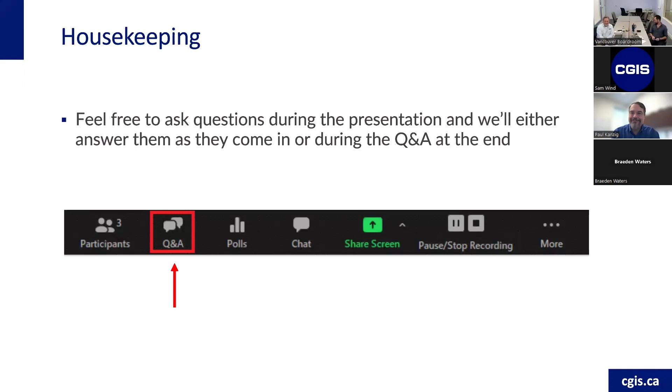So thank you, everyone, for your time. We'll run through this. Hopefully, some of this is maybe information you already know, but there should be some interesting topics in here, so we all come away with a better understanding of Adams' approach to check valves in water.

Adams is a German-based company, been in business for over 60 years now, still family-owned and operated. Back in 1960, Adams invented the triple offset metal-seated butterfly valve, which we'll touch on a little later in the presentation. We do have an extensive network of sales reps and distributors, premier companies like CGIS that cover Canada for us.

As I mentioned, our home office is in Herne, Germany. So if you were ever to go over there for witness testing, you'd fly to Frankfurt and then hop on a train for about an hour and a half. We've got over 1 million square feet under roof there in Herne. We do have another facility in Switzerland, right there at the base of the Swiss Alps. Their primary focus is going to be on large diameter valves for the hydroelectric industry, penstock, fixed cones, etc.

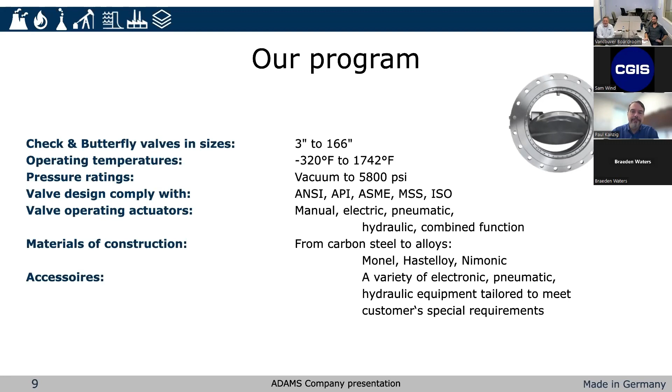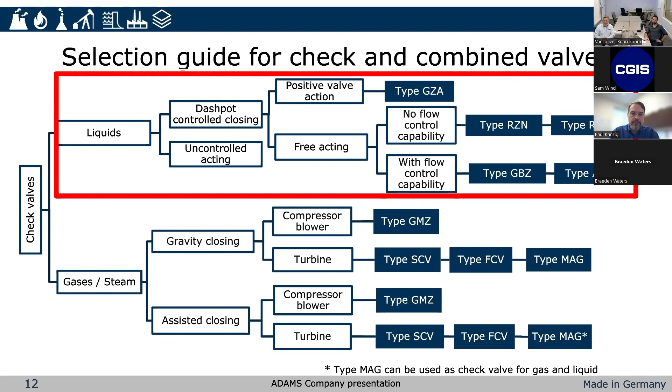Oh, skipped over there. So we have the most basic question, right? Why use a check valve? The simple answer is a check valve is going to allow flow in one direction and keep it from flowing in the other direction. What Adams focuses on is smooth operation of the check valve in opening and in closing. And unlike gases, which are compressible, obviously water is not.

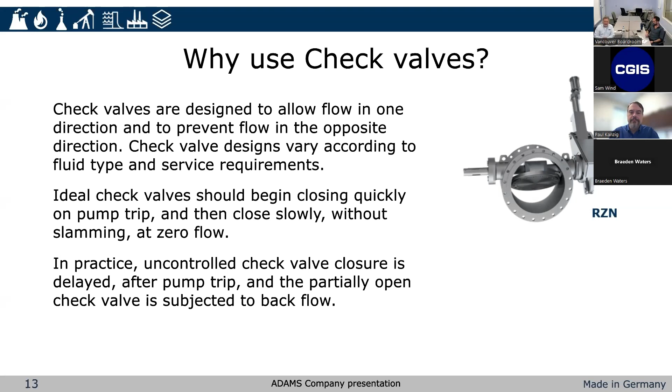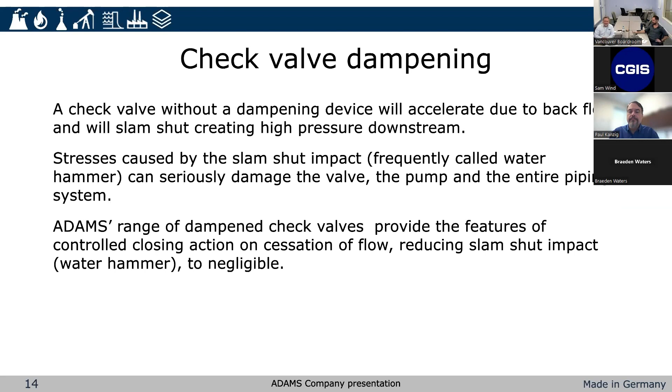So we place a very high emphasis on eliminating water hammer, which is why all of our check valves have some form of damping system, with different setups for adjustability and timing. We'll see just a standard check valve. You obviously have the pressure go up as the flow increases and then become steady.

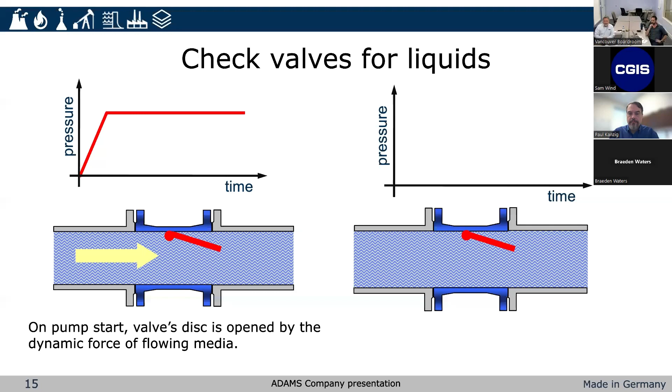The closing of a standard check valve is where our damping system becomes critical. We want to avoid that shock to the system that could damage the valve, obviously a very expensive pump, the piping. We've seen field applications where the piping has jumped off of the rails completely. So we want to protect all the equipment. We don't want slamming. We obviously do not want water hammer.

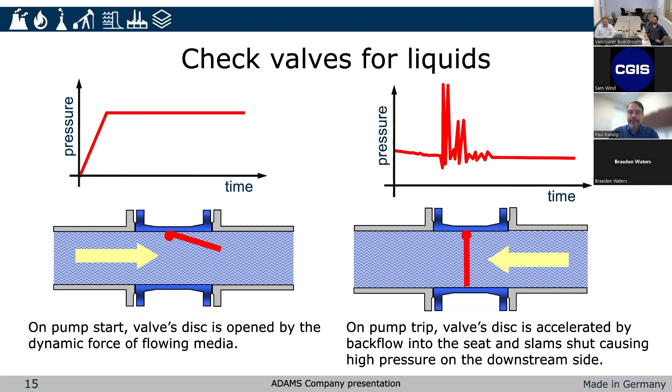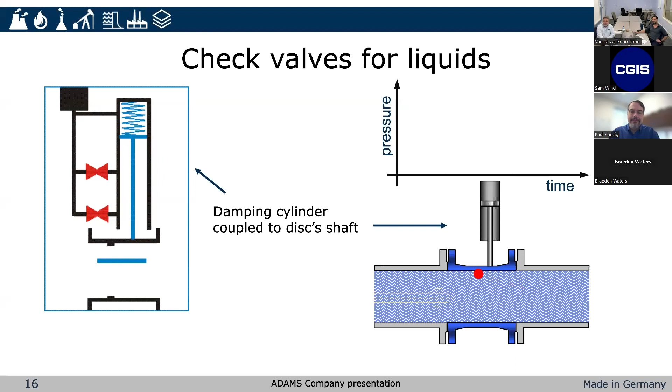So just a basic layout of our dampening system will include a spring hydraulic piston with, you can see, those two red valves on the depiction there. Those valves are field adjustable, and that's what gives you your multi-rate closing of the disc, so that when a customer experiences a trip, the closure is smooth. It doesn't slam, it doesn't damage the disc, and we don't get water hammer.

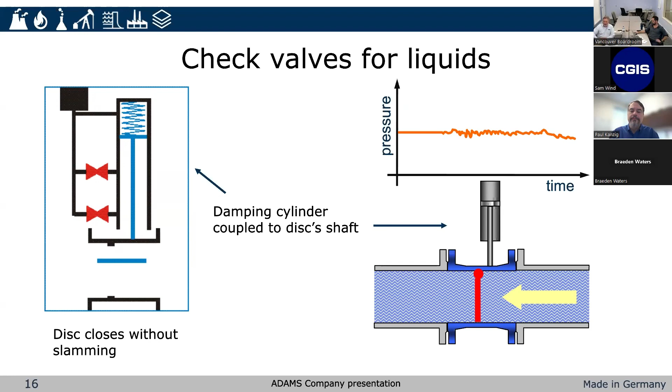Further here you can see, because of Adams' high eccentricity of the disc, this also aids us in smooth operation of the valve, keeps it from fluttering or jumping, and also brings it gently into the seat. I believe this is once the pump is activated. You'll see the hydraulic system controls the opening and closing. But the valve is a free acting check valve at this point. It is just smooth operation.

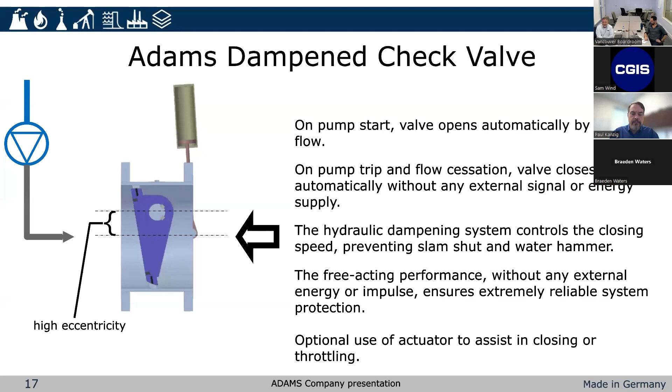We have just a simple depiction of the valve, again, closing. In real time, this would happen very, very quickly. But the controllability of the closing keeps the valve or system from getting damaged.

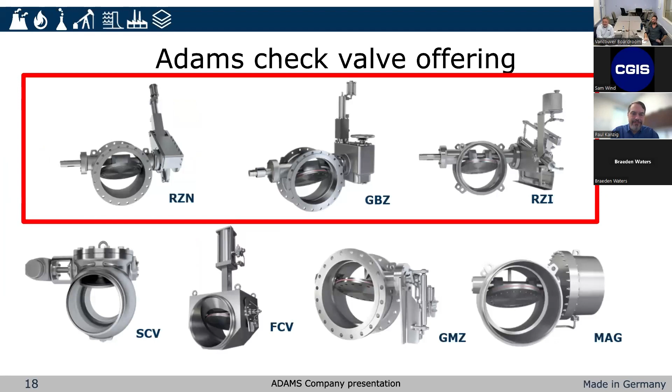So, main lines for us. All those letters are German, so if you speak German, that would all mean something to you, but our RZN, our GBZ, and RZI are going to be our check valves for liquids, the ones on the bottom there for air and so forth.

Wanted to touch on the importance of the triple offset inclined conical seat design. You can see here, when Adams invented this design, the first and second offset being the shaft has been moved vertically and then horizontally from the center of the valve body. And that gives this disc a full camming action. The third offset has to do with the geometry of the seat and the disc itself.

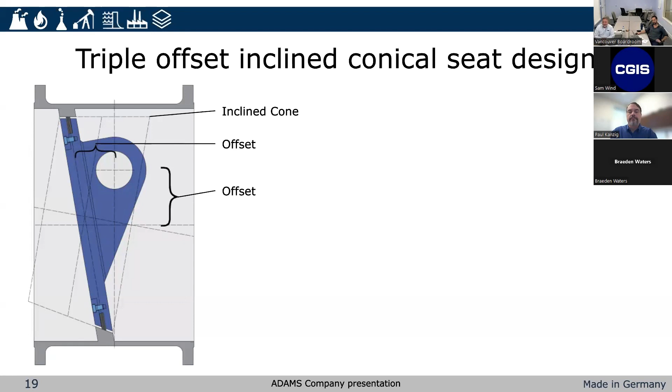So if you were to draw lines out to the right from those angles, the point of that cone is an inclined cone. It wouldn't be centered in the valve body. And this allows the disc to come into the seat with no friction, no rubbing. It just sits down into the seat.

And this is something that set Adams apart decades ago and allows us to provide the client with longer lasting valves that give them repeatable tight shutoff, zero leakage shutoff. And then the seal ring, 20, 30 years down the road, can also be easily field replaceable with this design.

One other advantage, if I could add? Sure. Versus a standard swing check where your seat is perfectly vertical, ours being offset allows the disc to easily set in. And so that helps before backflow begins to push it back. We're closed. Gravity can pull it down and into that seat, and it doesn't require that backflow to push it into the actual seat. So that is the other advantage of having the offset conical design in our check valve.

Just real quick, one question that came in on the previous slide was, are these valves piggable for pipeline applications? No, unfortunately not. Okay.

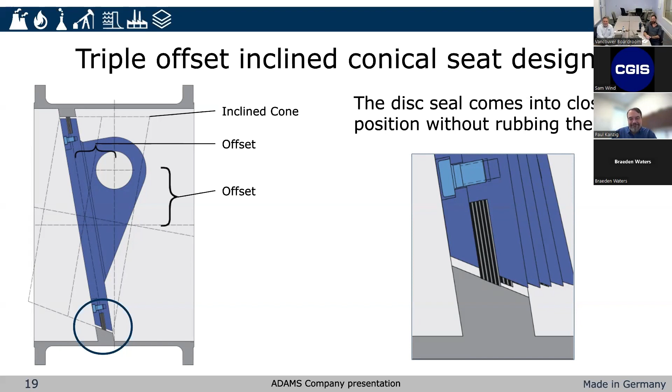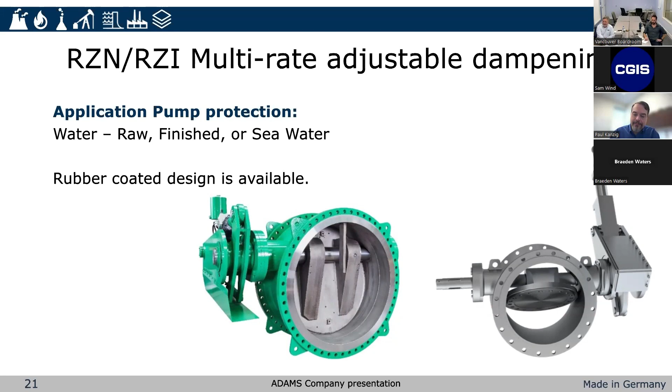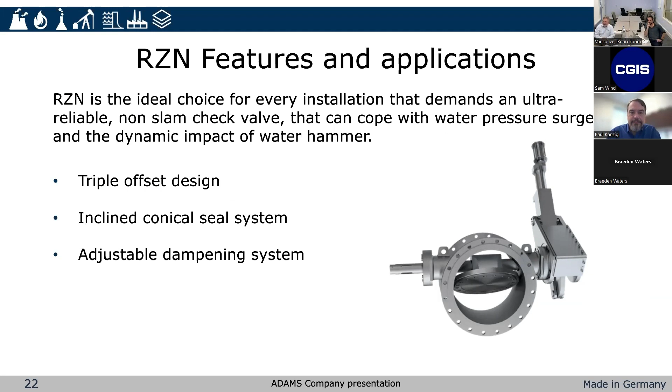You can start to see the damping systems on those valves, the dash pot and so forth. So we covered the triple offset design. Paul touched on the incline conical sealing system. We want to chat a bit about the adjustable damping system on all of our check valves. So you have the flow control valves on the damping cylinder so that the client can adjust the speed at which the valve closes. And this is important on setting up the system.

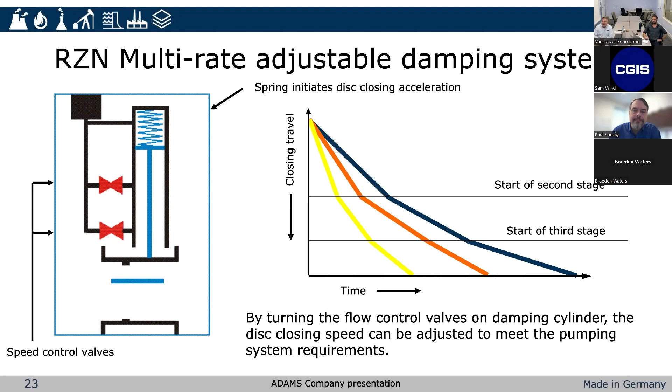We designed the valves with internals as light as possible, for lack of a better term. It's very sensitive so that it will close quickly, but the first stage will allow the valve to close the majority of the way, and the second stage hydraulic will kick in, slow the valve so that the final few degrees of closing are, although quick, they're not violent.

So just facts and figures for the RZN, the nominal pipe sizes, temperature range, and pressure classes that these valves are manufactured in. This is a real workhorse for us, very popular all over the world. City of Regina just purchased some here.

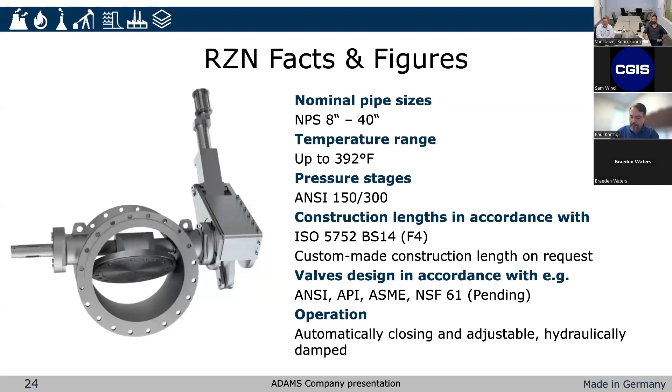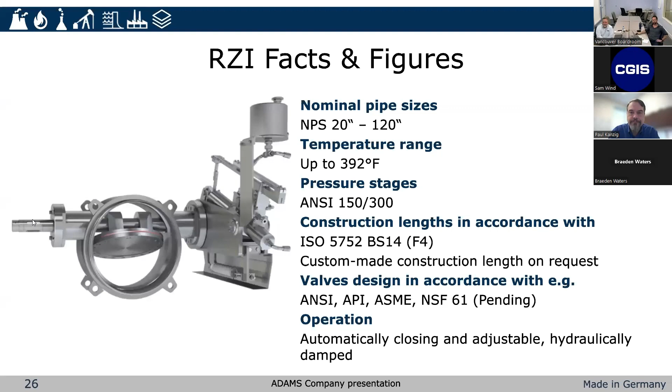RZI, similar to the RZN, but as you can see, larger pipe sizes, which requires some extra design work for us on the damping system. And full disclosure, these valves are available with a lever and weight. Let me back up. You'll see these check valves do have the shaft continuing out the other side of the disc on the opposite side of the damping system, where you could include a lever and weight if you wanted to. I've yet to have a customer ask for one because they work great without them.

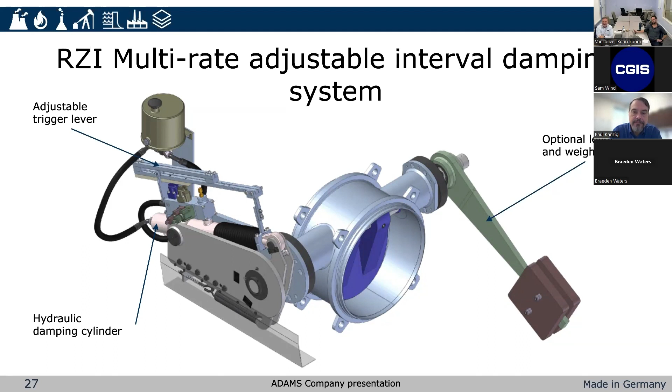But let me get into more detail about the RZI multi-rate adjustable system. Because of the size and weight of the disc, we have some similarities, but a few extra bells and whistles, so to speak. You can see here, you still have your adjustable valves to get your multi-stage closure of the disc, but we incorporate a slide arm that allows the designer or end user to control at what point this begins. You can slide it forward, backward. It's fully adjustable so that you have different controllability than you do with the RZN.

With the RZI, you would have sort of a standard, I guess you would call this sort of factory setting of the closure. And if you need to utilize the slide arm, you have further adjustability, which is necessary if it's a 60-inch valve. That's a lot of weight on that disc. So in addition to the multi-stage adjustable needle valves and the hydraulic cylinder, you can further adjust using this slide component.

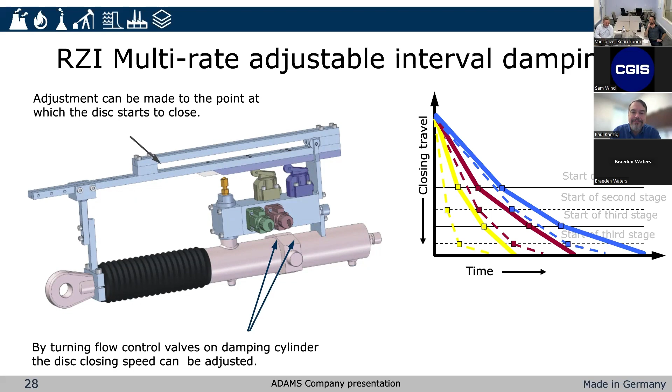And now we'll get into, I guess it would be kind of mine and Paul's favorites. Our check valves that also offer throttling and shutoff capability all in one valve. So this would be our type GBZ and type AZI. You can see these valves are similar on the inside with the incline design and seat, the triple offset eccentricity of the disc, but the magic happens outside of the valve body.

So the AZI and GBZ both work as check valves, free acting check valves, but it gives the user the ability to control the valve as well. We've regularly put position indicators on these valves so that the user knows exactly where the disc is at all times. They still come with the adjustable multi-rate damping system, but they also offer the client the ability to control this disc on pump startup and closure,

so that they can use this valve for isolation and then throttling. And once the pump is running, it's a free acting check valve. And we accomplish that by what we call a free travel coupling. It's a clutch, if you will. And when the free travel coupling is disengaged, the valve will act as a free acting check valve, but the operator can then engage the free travel coupling and control the position of the disc.

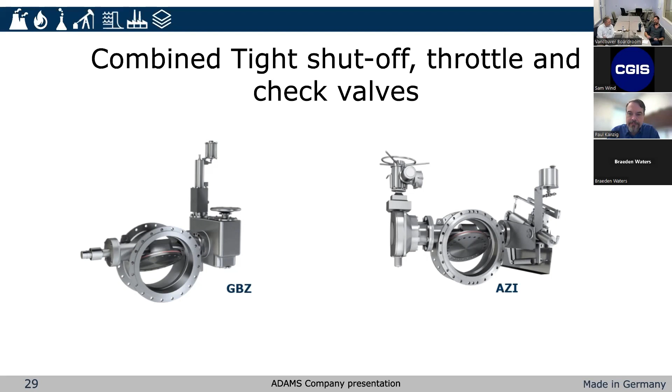So just going back to that question, I know with the triple offset butterfly design with that seat protected, we normally say we're good to sort of 4 or 5% solids without worry, compared to some of the other triple offset designs where the seat in the body is exposed and debris and particulates can definitely have an effect on the sealability of the valve, whereas you guys at Adams were fairly confident with higher percentage of solids. And again, being metal to metal, true zero leakage isolation, we can maintain that fairly significantly. So I agree.

Yeah, we're comfortable with that. You guys up here see plenty of applications where we're successful in the 4 to 5% range and still get long-lasting, repeatable results. Before you go any further, I got one more question that popped in, and then we'll get moving.

Is the combined function check available for natural gas, sour or sweet applications? I assume yes. Right now we're sort of focusing on the liquid ones, but if you looked at that decision tree, there was the whole flip side of the sheet. Yeah, we have a whole other line for those, and yes, we offer the same functionality in gases. Design will be slightly different, but yes, it's the same concept.

Right, in refineries where they have a main air blower or control air blower, our valves are very popular because they can track the position of that disc, they can control it on startup and shutdown. But if there's a system trip, it closes very quickly, but smoothly.

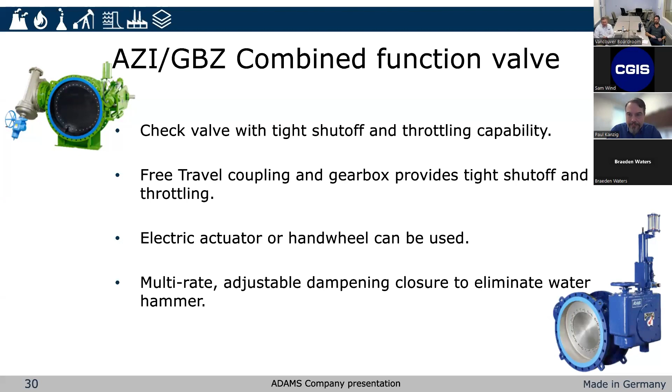Right. And also, as Paul mentioned, having that inclined conical design. I don't know who all we've got on the webinar here, but a standard swing check valve that's 25 years old that gets some wear on it may close most of the way, but not all the way. Ours close all the way. Or they'll hit the seat and bounce off and be off 6, 7, 8 degrees. We are not interested in that type of valve performance here at Adams. Thanks.

Point of note with the combined function valve is it eliminates the need for a check and an isolation valve. So when you're designing a system, you can lower your weight. Space requirements are obviously at a premium in a lot of underground or in-ground vaults. And there's cost savings and pressure drop benefits as well. We generally see 1 to 2 PSI pressure drop across our discs and our check valves.

One thing to mention too is, best practice for check valves is to have a free run before and after the check valve, before an isolation valve or an elbow or anything like that. So space really becomes a concern, especially with the larger valves, having to get that 5 or 6 pipe diameters in front and after the check valve, whereas if you combine it, that eliminates that consideration. Exactly. So for new systems being designed or retrofitting an old system where we want all of the weight and space savings along with combined function, this is an excellent option for an operator.

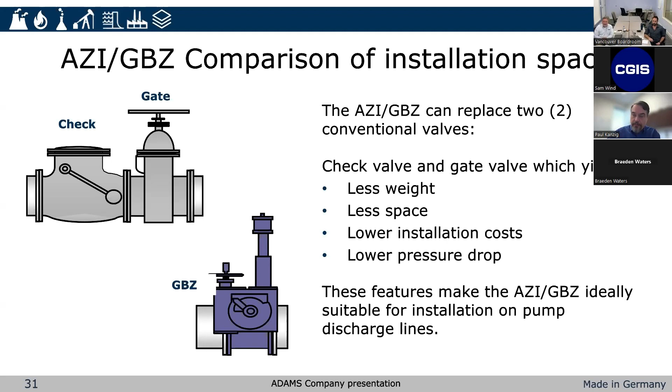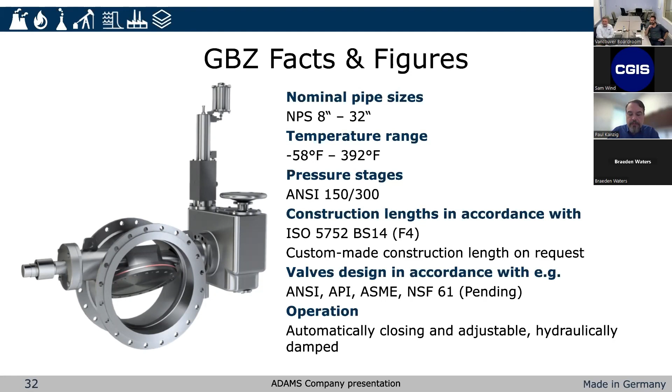So there's the GBZ size range, temperature range, pressure classes. You can see it still has the multi-rate adjustable dashpot. You can't quite see the needle valves, but they're there. And then obviously the gearbox that allows the operator to go up and open or close this valve. And then you can add actuation to this. Many times it's electric, and there you go. This one includes a gear and motor combination.

And these valves being adjustable offer the client the option down the road should process conditions change. If the manifold changes, any number of reasons, this valve can be adjusted in 10 years. So a wonderful thing to be able to put in front of a client that's looking for something long lasting, reliable and flexible. As Paul had mentioned, many of these are made from scratch. So the internals will be custom to the design. The face-to-face can be custom to the design.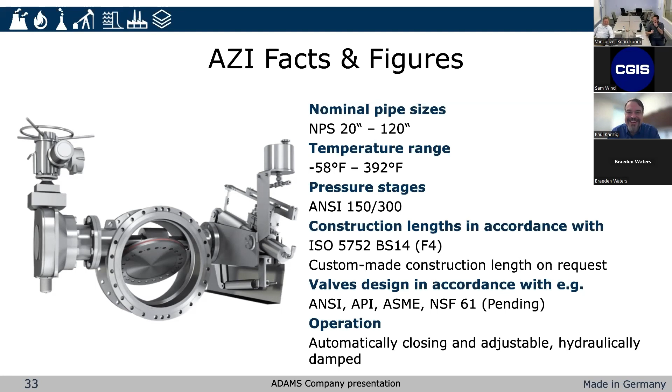Thanks. All right. Back to you guys, I believe. And then this goes. So that was the end of this part of the presentation. I think Paul did over. Yeah, I think if you keep going, there's one more slide. These next slides, yeah.

So this will show you a little bit better how that free coupling, or free travel coupling as we call it, works. It's a little harder to see here, but the green section is the part that is attached to the actuator, and the yellow is what's actually on the disc. So if you want to play that video, Chad, as you can see, we have it here in the locked isolated position.

Maybe our video isn't going to play in Zoom.

Yeah, not sure why that's happening. I'll find another slide deck. Bear with me for a sec.

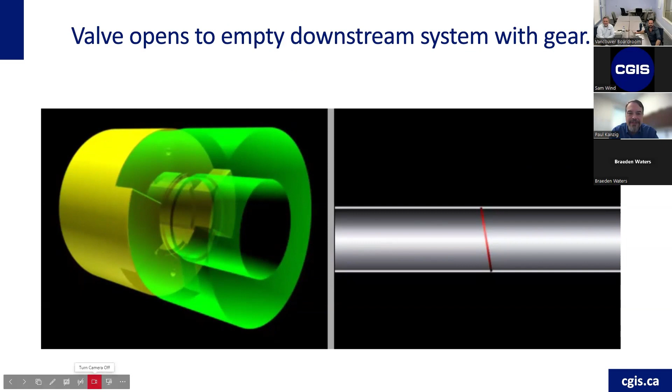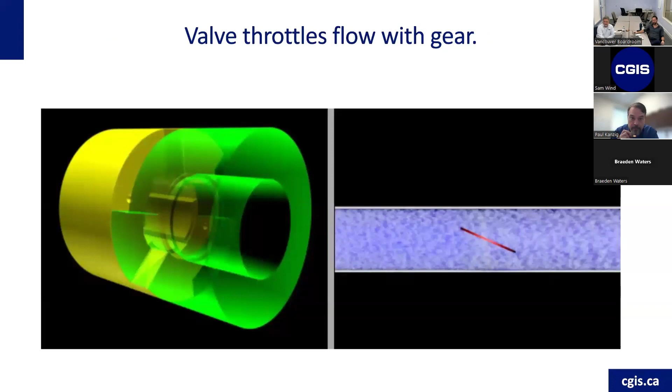So maybe the video didn't come across as well. But you can see, actually, if you go back one slide there, you can kind of see in this mode, this would be the valve throttling with the gear. Go back one more. You can kind of see where the green and the yellow, how they're engaging. Yeah, you can kind of see that, and go back one more

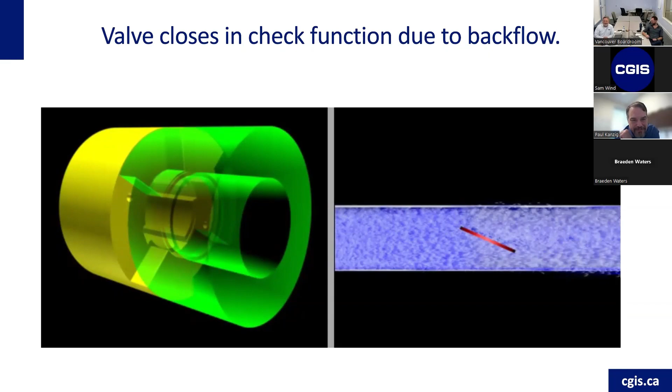slide. Yeah. Here, let me try my computer, 1 sec. I'm just gonna switch the screen. The animation helps a lot more, so bear with us. Yeah. That's okay. We have another slide. All right, let's see if this works. Can you guys see my screen? Yes. Yeah, okay. There we go. And you can see even this explanation down there at the bottom too, but there we go. We can see it a little bit better now.

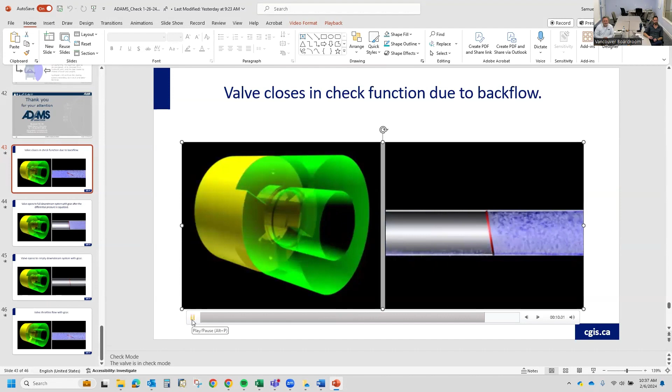As you can see, go ahead and start that video again. So we're in normal check mode. And then we are actually, I put that backwards. The yellow portion is our actuator. The green portion is my check valve. So you can see where we turn the yellow portion of that shaft, and it's turning to then lock that disc closed to hold it closed. Okay, you want to move to the next slide.

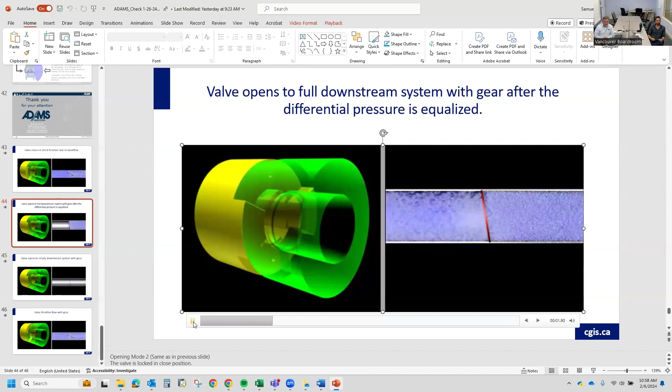And now, sorry, as Braeden was saying, we can adjust and not open the valve until we're ready, until we have that pressure equalized across that disc. We can keep it locked in that closed position, and then, as we see, turn the yellow shaft so that the check valve then operates as a check valve. Okay. And the next one.

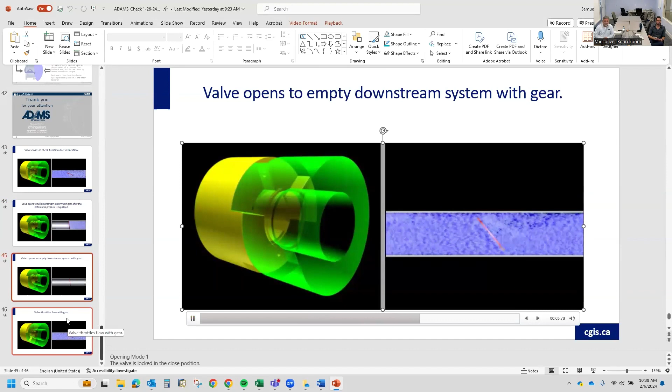So here, once again, we're just going into plain check valve mode, so allowing it to act as a check valve. And then the last slide is where we're just throttling it with the gear, and we are forcing it now into a certain position so that the disc throttles the flow. So it is a unique design, and something that, once again, if you have the application, we definitely want to come and talk to you in person to show you our samples and to get your application so we can customize it for what you need.

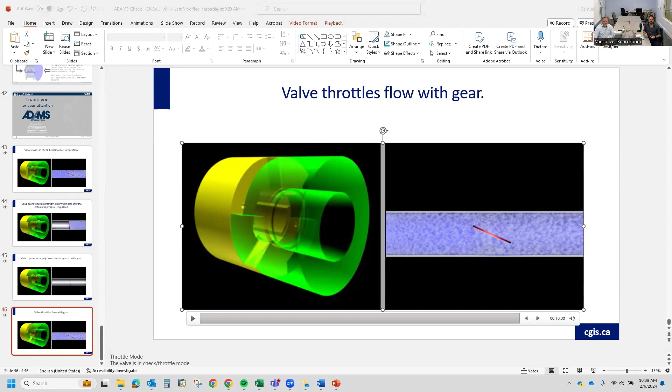Great. Thank you, gentlemen. Maybe we'll jump to some questions. First, what specific applications in water and wastewater do you see these being used most? Well, it depends on the applications. I guess what we see a lot more is multiple pumps going into a header system. If you have more than one pump going into a header system and you want to isolate one, so one comes off line, all that flow is going to come back to the one you just turned off very quickly. And so we see that a lot in those systems, especially these combined function.

So you can dampen that flow, or that speed of that disc, and that water hammer that can affect your whole piping system, and then you can have the valve be the isolation for that pump afterwards. So that is one of the main applications, when you have multiple pumps in one system. Another application that we see a lot of these go into is when you're pumping up over a long distance, over mountains.

If you have just one pump and you're pumping for the most part horizontally, it's going to be okay when you turn it off. You're not going to get a rush of backflow. But if you're pumping uphill, more vertically than horizontal, and you shut down that pump, you're going to have a very large head of water rushing back towards that pump. And if it's not dampened appropriately, you're going to get that large water hammer and slamming effect.